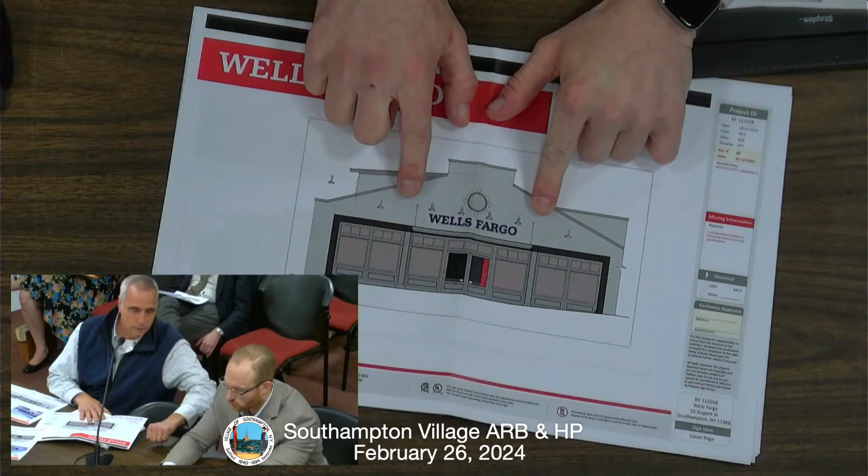There should only be one canopy. If you're talking about the facade of the building that faces east, let's use compass directions. So that's the east-facing facade, correct? Correct, with the canopy. Okay, I think that'll be clear.

Okay, all right. It'll be a metal canopy with an internally directed gutter along the backside of the canopy, so it won't be an exposed gutter. It'll be an internal gutter in the canopy itself, and then a leader down through the building and out onto the pavement. Details haven't been drawn yet, but once we get to that point, we'll submit those drawings.

Well, here's the tricky part, we can't really give you an approval for something we haven't seen. I can give you directionally what we think, but I can't put the cart before the horse. Of course, so let's do this.

Let's talk about directionally what we think, and then we will talk about the signage, because I know you need to get it manufactured. I know we've held this up a little. I'm trying to be fair.

And on the side facing south, the south facade of the building, that's just signage and lighting on the existing as is. You're making nothing else over there, correct? Okay, so you are proposing the signage and then the light fixtures, correct?

And four of them. And are the Wells Fargo lights backlit? No, that's why we removed that. They were originally, but we got rid of that, so they're just gooseneck lighting. Are they showing the placement of the gooseneck?

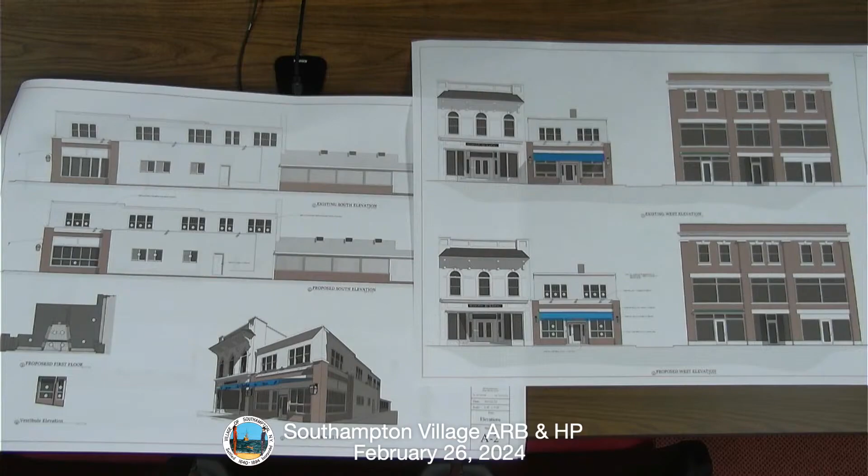So there are 3 panels, but you said bifolding? Yeah, they're gonna bifold into the store itself, into the restaurant itself. So all three would fold back against one wall, so you'd have a big opening? That's correct. I'm trying to get, how do you get from 3 to 2? Oh, there are 3 window panes, if you see here on the blow up, the accordion - they back, accordion into the corners.

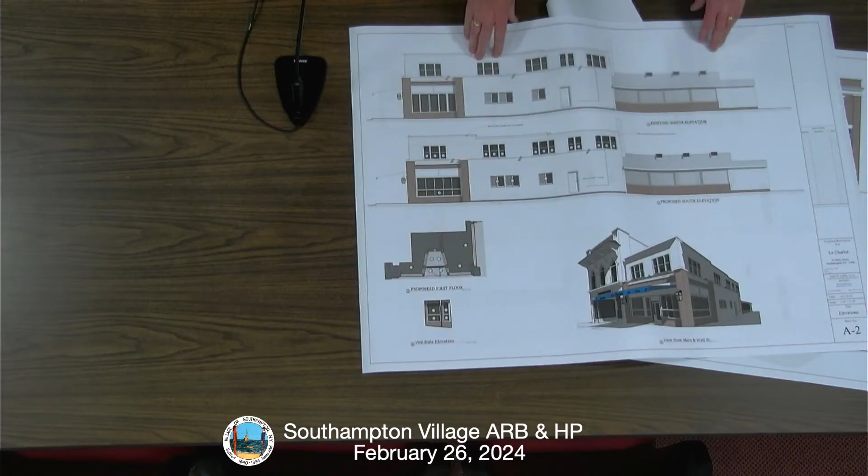Oh okay, I got you. Allows the bar to be open. Okay, yeah.

We kept the door the same, we put the old front door back the way it was. So really, I think the only change you'll see marked a little different would be the window configuration of the restaurant.

And the bifold would make it more similar to the appearance of the plate glass that was originally there? Is that something you mentioned last time? Well, the plate glass was a single pane, now it'll be 3 panes. But this had 3 panes originally, 1 horizontal and 2 vertical.

Can you move the mic over for me? Oh, he wants you to talk into the mic. So if you're at the table, maybe sit, don't stand in between, it's like Simon says. Okay, can you hear me?

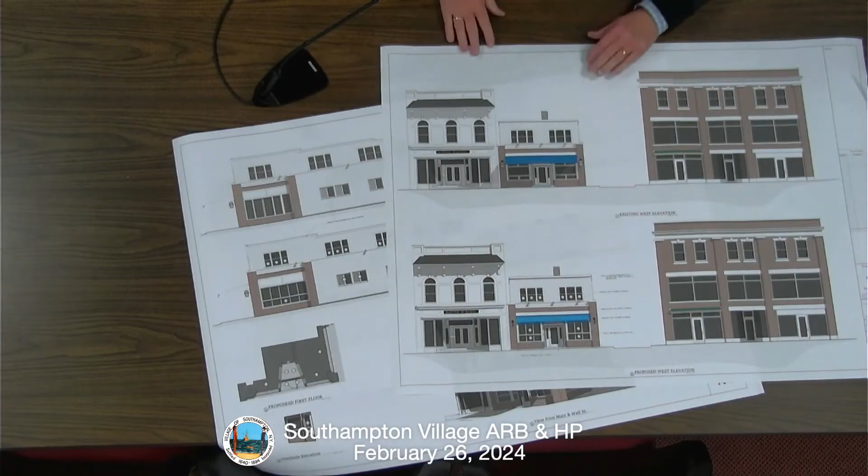Great. So these are the existing window configurations. Basically it's a 5-light window, and we're going to be having a 6-light window. Where there were 2 here, now we have 3. We need to create the horizontality of these folding windows. So the real change will be in the window presentation to the street. Otherwise the rest of the building is the same.

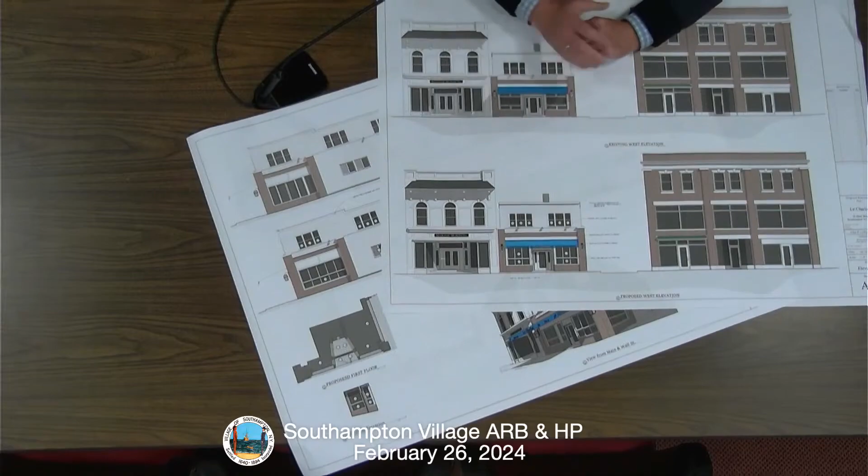And I know we also kept the same lighting. I know it might be an issue, but I looked at it through the eyes of when Zach gave us that picture of the building from 1979. The fixtures appear to be the ones that were there originally, they've been there for 45 years. So I figured we'd probably keep them, but that's something we could discuss.

Here's my question - if you're going to all this work on the building, those light fixtures, right now isn't that exposed pipe going across the front of the building? Are you gonna rewire them into the building so we're not seeing that exposure, that 1-inch pipe across the front? Yes, we'd like to do that.

So the fixtures are staying, but you're remounting the light boxes. Yes. And also on Bank Street there are several lines of communication and wiring that we'd like to get rid of as long as we're doing it, just cleaning it up.

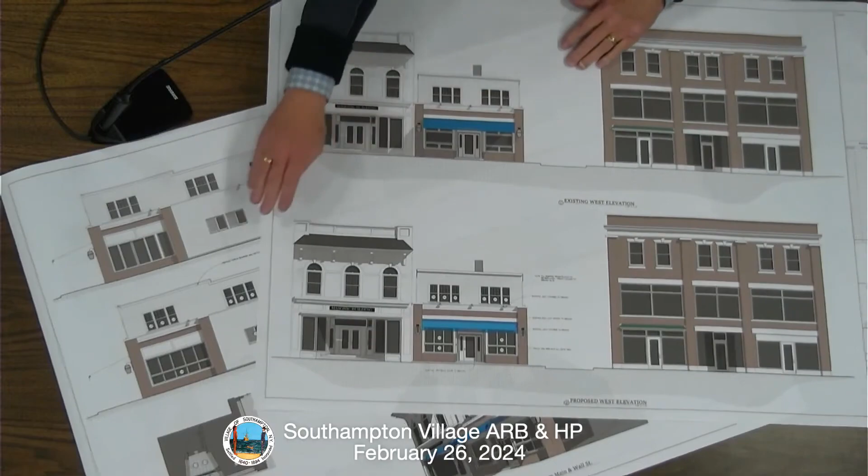My point is that if you had the option to put in a fake laminate floor or a real wood floor, I would any day prefer the real thing. So that's why I'm not familiar with fiber cement and don't know what it looks like. Does wood not work? I'm just curious, I had proposed wood siding.

Because it's natural, like we're trying to be eco, I'd be totally fine with having a wood sided building. I think that's obviously appropriate for 1902, or 1912 when the building was built, if not for the fact that it looks like these asbestos shingles have been on there since then.

So this product was designed as a replacement for when these fall off, because they're brittle. If you go down Broadway, you can see where people kick it and they break, they're fragile. They're better now because they're fiber, so more durable, but they're meant to look the same.

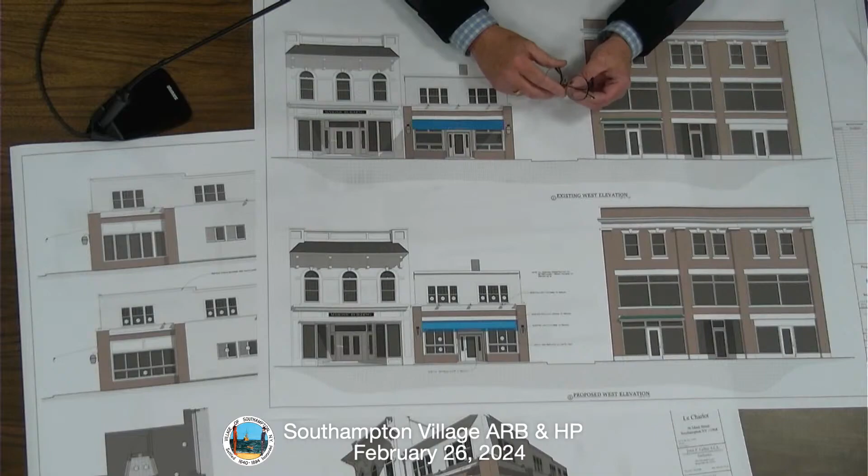I think they'd like to see a sample. I can do that. So if John is bringing in a sample, the question is between wood, natural wood, or the substitute, perhaps a sample of wood, so this way Jane and I could see a comparison. Not a problem.

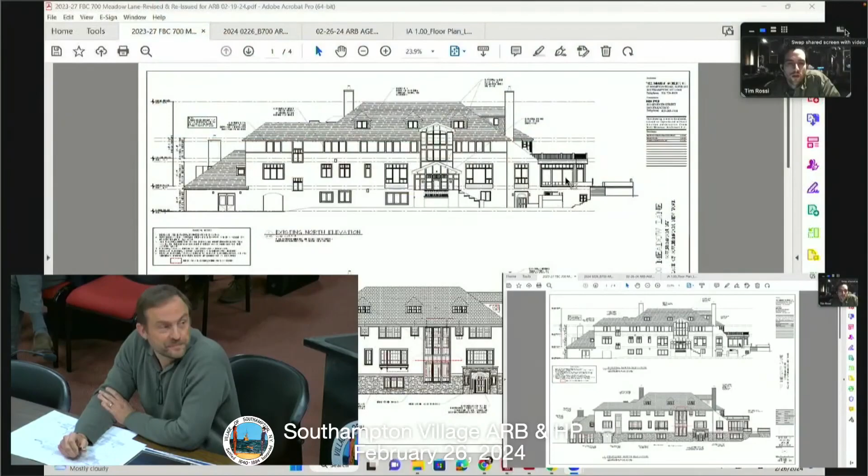I believe one of the bigger issues or questions of the last meeting was the front door entrance. So we have gone back to the original roof line and replaced the entry into the historic location.

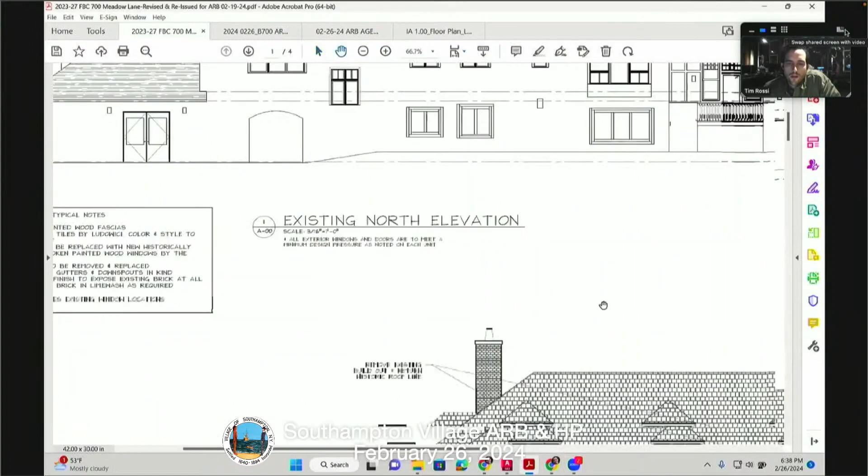So as you see, this is the existing design with the large stair tower that was objectionable to most of the board. I'm going to zoom in to show the revised elevation, which is much more in keeping with the historic fabric of the building.

We've replaced the stair hall with a large divided light window. We've gone ahead and changed all of the windows back to casement and kept the divided lights, again, to make it as historically accurate as possible. We've changed the window openings so they are more varied throughout the front facade.

At the front door, we've reused the existing front door that was previously located here and added a window. We've also changed the masonry base from brick to stone, so it feels more in keeping with the English manor style of the original building. In the renderings, we've shown this as a carved stone surround with openings on either side, so it's much more historically accurate.

Going to the side elevations, most of this is remaining as previously presented with some small tweaks here and there.

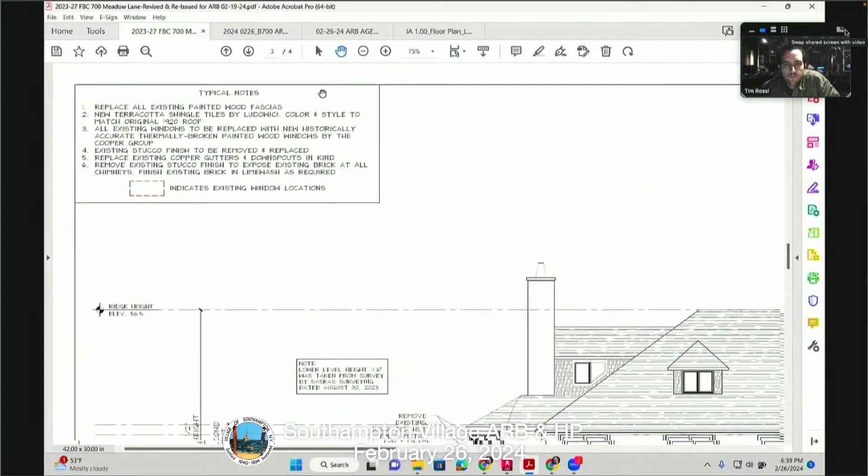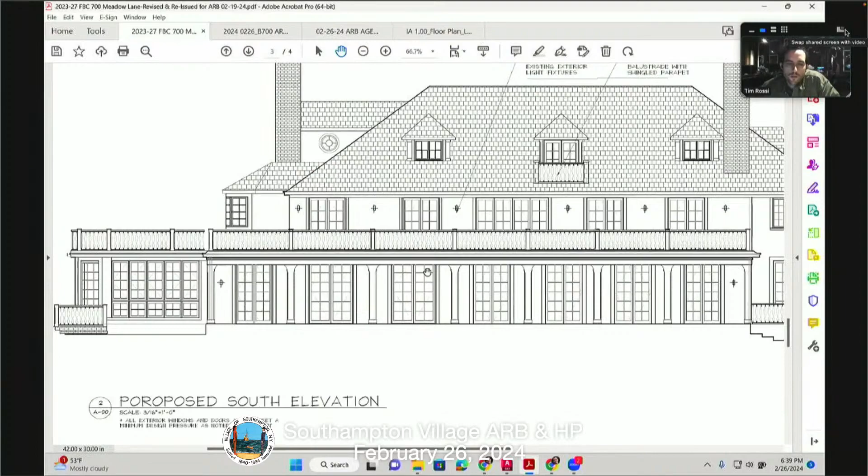On the rear facade, a major comment was the existing balcony with the trellis and the larger columns, and that the front facade felt disconnected from the back. So we've made all of the windows on the back divided lights, so it's much more in keeping with the front, and have shown a more simplified, open column, as well as changed the balustrade to something more in keeping with the style of the building.

I'll go to the renderings.

You'll see here some comparison between the historic image and our proposed elevation, also showing the carved stone surround we're proposing for the front entry, as well as the more varied stone base that would wrap the bottom section of the building.

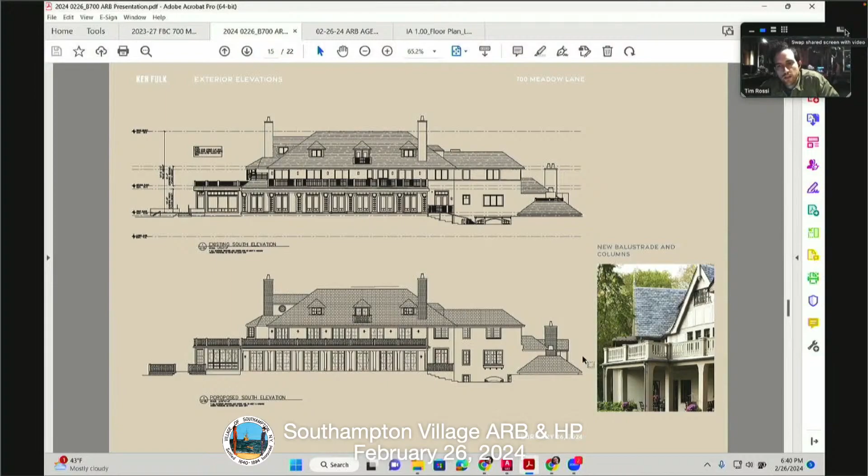On the back side, showing that more Tudor styled column, as well as the balustrade that wraps the balcony on the upper level.

And then a rendering showing the new facade without the stair towers. That roof line is really expressed and strong. Coming up to the front of the building, you'll notice the cast stone surround and the more varied base stone on either side.

We've kept the vining in keeping with the historic image, and also have some small windows around the entryway. The existing stair has gone away, so we've planted that entire area to make it much more lush and softened that front facade.

On the back side, you'll notice it's much more open. We've taken away the double columns as mentioned, and shown all the divided lights. And then you see it here from the sky, which is mostly in keeping with the existing fabric of the building.

I'll go back to the front rendering for any comments. Board members, does anybody want to start first?

I think it looks good. Great, it's good to hear. We're very happy with the change, honestly. It has the feeling of the original. I think it's so charming, an old house. Thank you. Well, I think what they did, if you look at the original photographs, they went from what had become a bastardized building to restoring it to what it was.

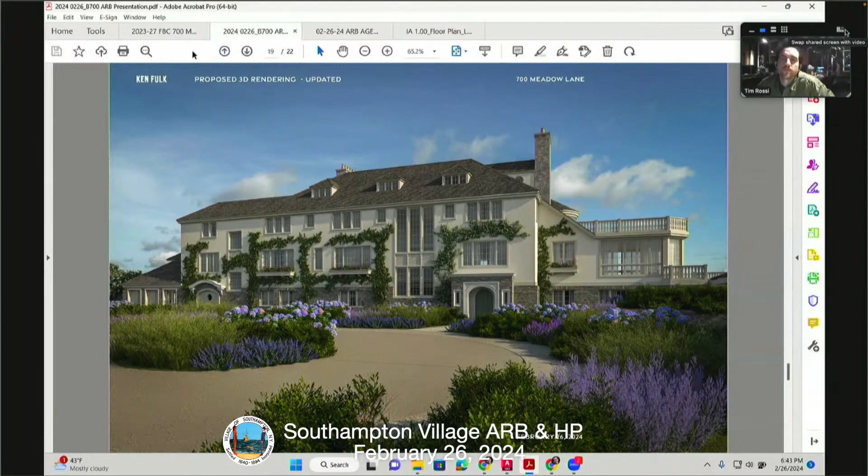Yeah, we're probably colored by the lack of color and the presence of sepia in this vintage picture, which makes it look more earth tone than cream color, almost like a cafe au lait.

On which facade? On the original Frick house that you sent us as inspiration - that big picture, 700, that looks to me to be brick.

And I believe the original house - was it stone or was it brick? Is there a historic reference to it? It's unclear from the photo, just given there is definitely a datum line you'll see.

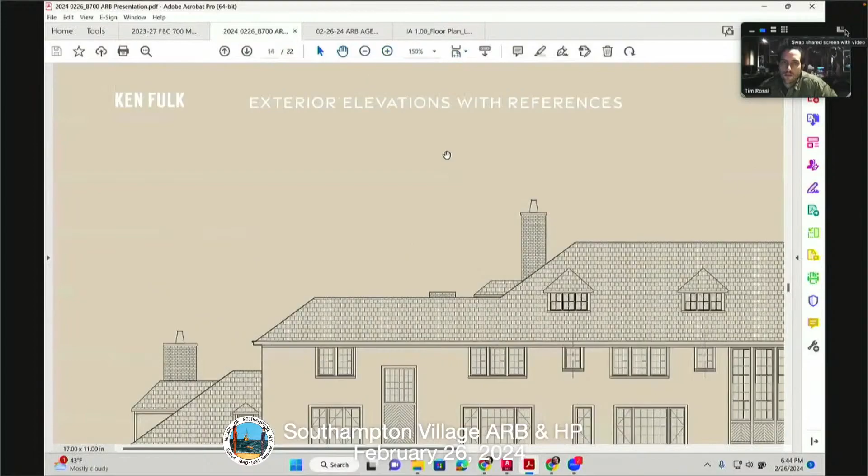Does any of it still exist behind whatever? No, it does not. Really? No.

Is it also a framed wood wall with stucco on it? And in your renderings, are you stone across the front and brick across the back? No, we've only used brick. We're reestablishing the brick chimneys - right now they're covered in stucco. Okay, so we liked the mix of the stone and brick.

This reference, on the lower left, is a coastal building in Rhode Island. But this architect, Harrie T. Lindeberg, worked quite frequently - worked on the Coxwold building that you pointed out. That was all stucco, but felt it kind of anchored the building more than the brick would. And in most cases, if we are referencing this house to be inspired by an English manor, stone felt more appropriate.

That's one of the things I'll ask Zach in his report, because you just don't find very many examples in Southampton of that kind of stonework, and you wouldn't have then.

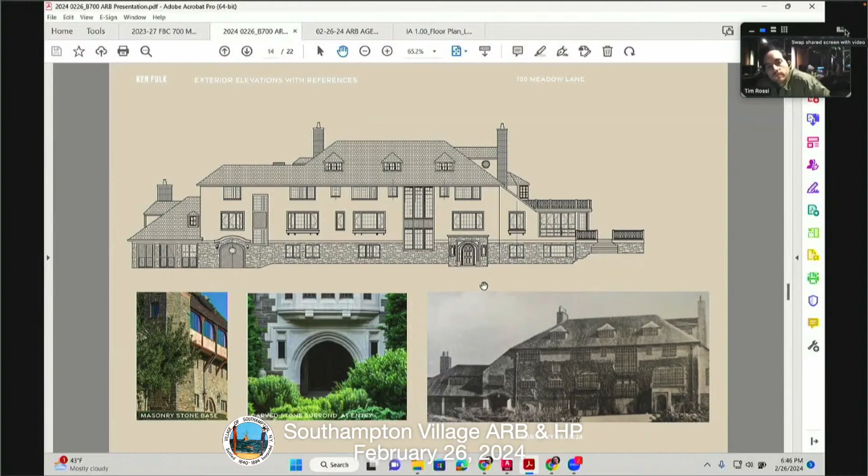Otherwise, you brought the house miles forward. You really listened to a lot of the issues that we had to say, and I think we're coming along very nicely on this house.

Other board members? I think the way the landscaping relates to the entry is really successful and made big improvements. Also moving the front door back down is so much better, and it has a more welcoming, inviting feeling versus being almost a stand for speeches. So my only comment would be the stone versus brick on the bottom wall of the house exterior - we'll see what Zach has to say about that.

Are we gonna talk about the other side? Go ahead. I'm confused about those weird columns - those were not originally there, you know about? We haven't located an image of the backside of the home. Where did they come from? They're currently on the home - they're existing. Oh, okay, thank you.

And this change was also preferred by the clients, just to open up the porch a bit more, make it a bit more open and welcoming as you're coming off the beach.

I think it's much improved. I would have never thought that by moving the front door over, it would make such a difference, but it really does. It really restores the house to its original state, so I think it's really coming along and looking great.

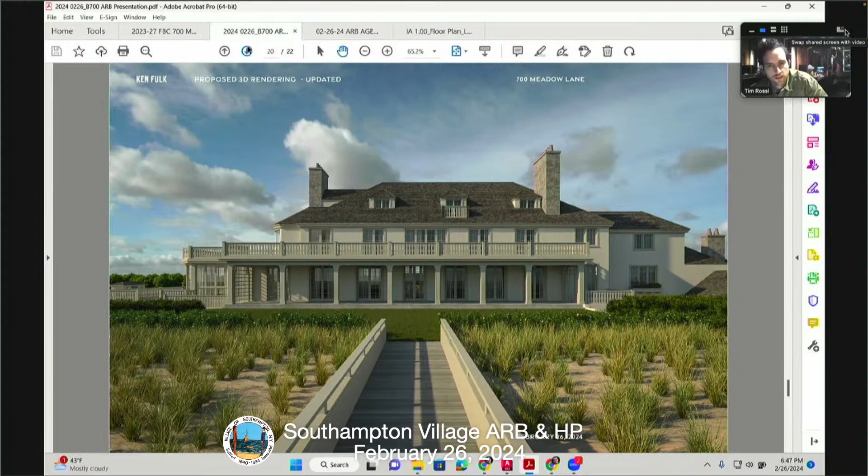Any questions or comments from the public? All right, so I'm going to adjourn this because we need the historical board. Understood. And then we'll see if we can do a little research on the brick versus stone situation there. Understood.

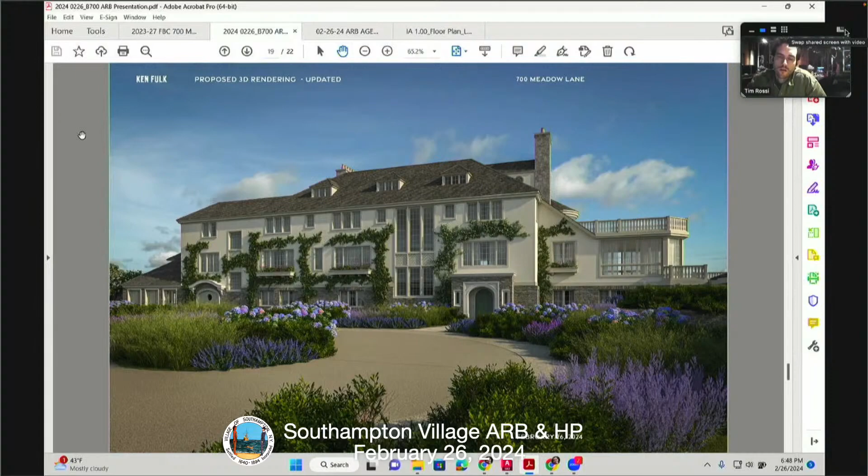So I'm going to move that we accept the applicant's request for adjournment to March the 11th for 700 Meadow Lane. Is there a second? Second. All in favor? Aye.

Guys, you've come a long way. Thank you, it's really, really nice. We didn't get a chance to drop these off. Do you guys want some copies of this presentation set? Yes, you can leave them here. That'd be great. And just to clarify, you're just looking for a set of materials for Zach, to make sure he has the most recent - the historical. Here's five for everyone.

Couple more 100 pounds of paper. All righty, so that brings us to adjournment. That takes us to new matters.

Thanks, Tim. I think Tim had a question, just to clarify the material issue. Is there anything further you'd like to see beyond the material samples in person? We're adjourned at this point, so we'd have to reopen the record. That's fine, okay.

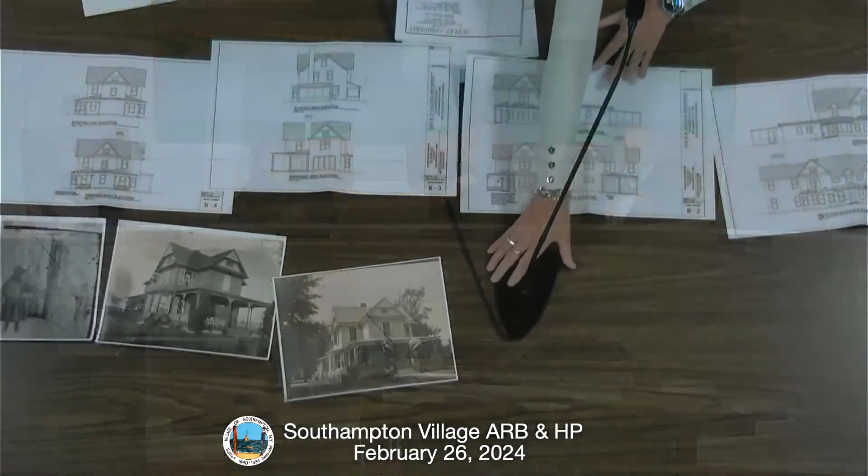Okay, this goes back to like the last trustee meeting. John did a long presentation. Nobody could hear it? None of it, just because the mics don't pick up from a distance. Okay.

Lisa Zaloga, I'm the architect for 121 Elm Street. This is a proposal to pick up the existing residence and put it on a new foundation in the same location, and do an addition on the back of the house.

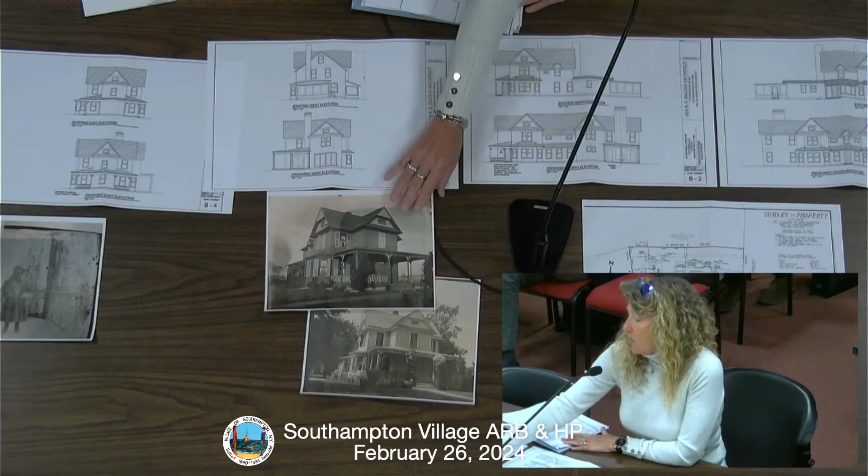We have some pictures from the olden days, if you will. So the front of the house at some point in time had kind of a wraparound porch, and at some point it was actually cut back to the little bump out that's on the street side, or the east side of the house. Our proposal is to put that back and pull that porch forward some, which if you look at this picture, you can see what I'm talking about. This front porch right here—

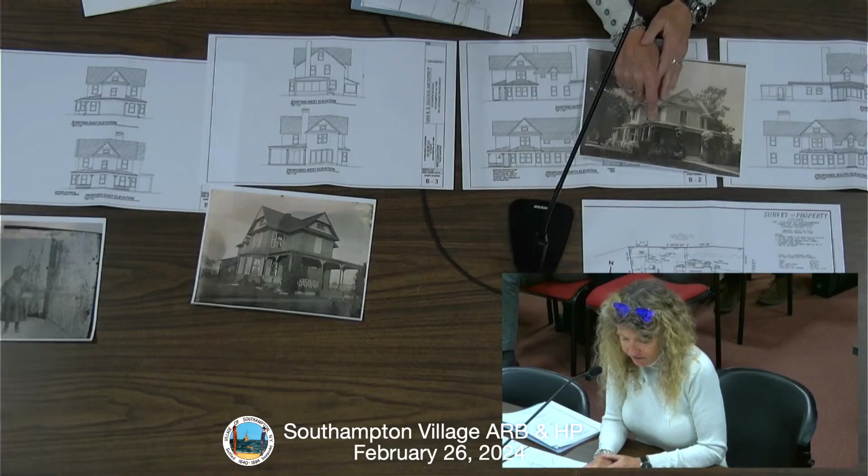Currently it's at this facade. It's pulled back, so we want to pull it forward, closer to the street, which you can kind of see here. Oddly enough, the front door to the house does not face the street. There are two side doors into that little front entry, but we still want to bring that porch back. Right now there's a big, huge rhododendron there, so you really can't see the front of the house at all.

Is there any evidence this was ever a duplex? Because there are several on that street. Yeah, because the door configuration was weird. The door is weird, but it comes into the same place, and the stair is actually in there, in that little foyer area. So I guess it's possible, but not probable. I just wondered when I was walking around it. Yeah, it's interesting.

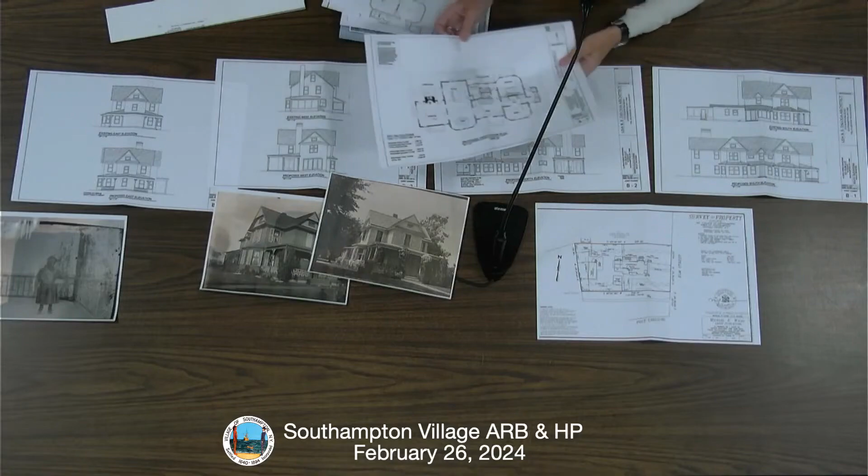So, like I said, our addition is proposed on the back of the house primarily, other than the change to the porch. If you walked around it, you'd find it has two gables, the cross gable at the front of the house, and at the back there's a one-story section, and then another one-story section that's currently a screened-in porch. Our goal is to take down the screened-in porch and the one-story section and put our addition on the back half of what's currently the two-story house.

The screened-in porch—I tried to find information as to when that was built. There's nothing in the building department for this house that shows anything back to 1971, so it was probably before 1971, but I can't swear to it. The one-story portion that's currently the kitchen was definitely added on, but I think it was added on a long, long time ago. If you go down into the basement, you can see where there was a stairway that's been boarded over for that addition. It's a crawl space, definitely done after the fact, but I can't say exactly when.

So, like I said, it's a two-story addition on the rear of the house, in the same general location as what's currently there, just a little bit shorter. We're also proposing a little pool house and a little two-car garage.

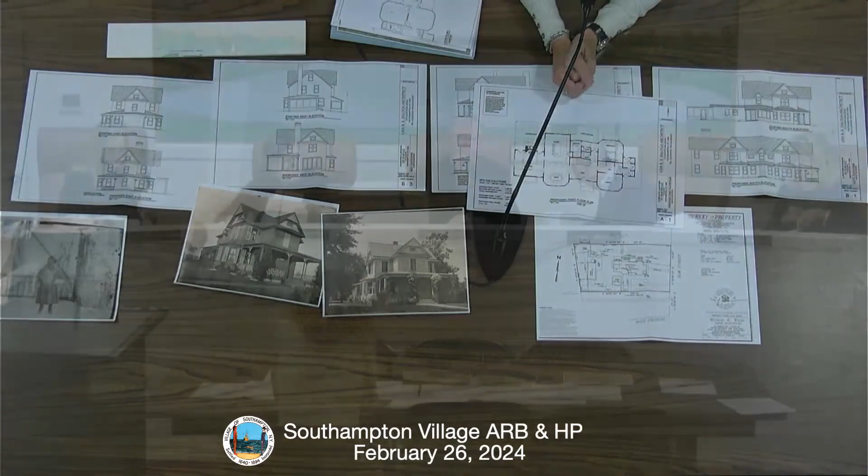Are we getting Zach in on this? Yes, well, one thing I will say, we will be getting a historic report on it, so we won't be voting on it tonight. I want to hear from him.

I think it's a really charming house, I gotta say, and it's certainly an ode to overgrown landscaping. I thought, well, this is the cutest house, and then I realized I drive past it all the time but I've never seen it because of the giant bushes - it's a very large rhododendron there. They're pretty fabulous.

Jane, Nina? Yeah, when you were talking about the stained glass windows, I was also thinking they're in the attic, so it doesn't seem like that would make a big difference to me. I would say whatever you can keep would help out. So I think it's looking good.

I would prefer a natural shingle over white, but I think it's better than the blue. Baby blue? Really, I love the blue, I like the blue. Yeah, I don't think it's historic, sadly.

Pending Zach's report, and I know Lisa goes to great effort to maintain and keep historic elements, so to the extent any of those historic elements can be preserved, I'd support that.

One thing that was of concern - you say you're lifting the house. Is it going to be the same level, or is the roof line changing? Same level, same location.

Just putting in a new basement? Are there any exit wells? Are they building out a theater and gymnasium there? And a spa in the basement? Yes. Okay, we're doing all of that.

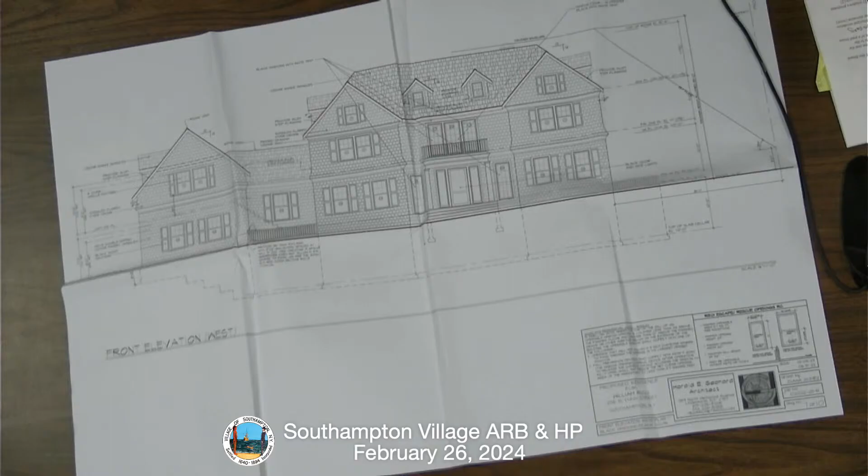No, it was not previously approved. It came to us, but it was never approved. That's helpful. It was submitted, but it was never presented. And the former owner had some - because I remember I walked the site, two of us walked the site at one point, right? But it never actually got to the meeting. Good, okay, perfect, good to know then. Well, we're here for it now.

Could I just ask, were the windows - was there a COA on this building before it was sold? It had to be, right? It was sold under construction.

Mike, identify yourself. Yeah, Dr. Ritchie, Bill Ritchie, I'm the homeowner. We bought the plans. It was never under construction before we bought it. Okay, well what is that up there?

But there's no CO? No, there's no CO. That's what I want to know - the windows. According to the current contractor, the color was not specified on the plans for the windows.

Okay, but you may know more about that, Mark, because one of the prior owners did a little bit of 3-card Monte with people, so as you know. That's true. I'm going to say let's just move on. I just want to make sure - I've been told that there was no fenestration color shown on the windows. I would find that surprising, but okay.

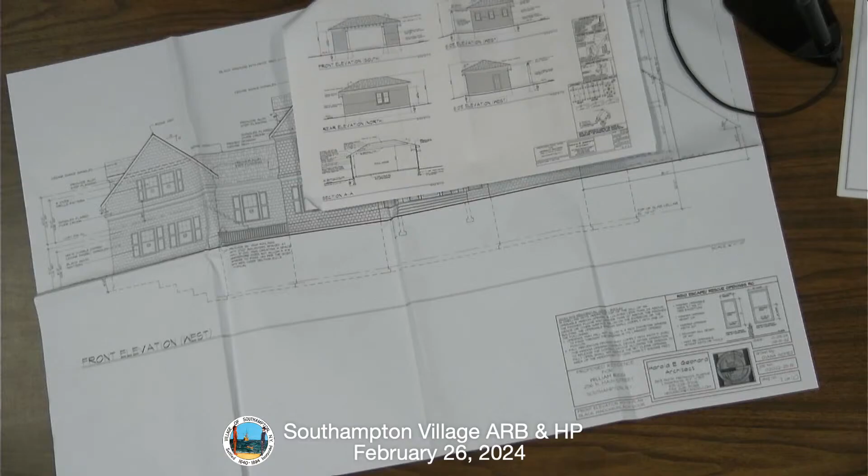Oh, here it is right there. So it's white painted cedar shingles, white trim, white windows, and a cedar shake roof. There's a little pergola attached to the pool house facing the pool and pool area. It's at the appropriate size behind the window. The closest visual feature to it is actually some of those large fuel oil tanks.

What's the square footage of this thing? I have it right here - 545 square feet.

So the pool house may or may not have been approved, but the records say there is one. What you're looking to do is just take the same thing and move it? Yeah, move it from the south side to the north.

No, from the north to the south. Like more sun in your pool. It was here? Yes, okay, my apologies, yes, from the north to the south. I was looking at the current proposed plan - my apologies, I thought it was moved from the north to the south.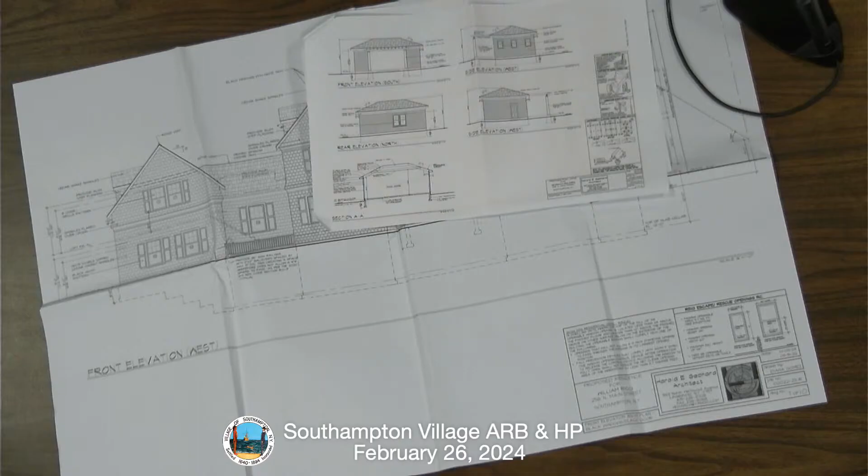What may have happened is there was an early request for this update that just never came forward, because I remember something like this, a very large one, tacked up to a board in the backyard when the house was under construction. And the permitting history I was trying to put together was a little sloppy, but we're here to try to sort it out.

So, board members, I'm a little confused. What is this, the house? Yes, the house, I thought you brought plans, and I'm just confused what the sequence of events is. But another builder came in and got the plans approved, and then the house was built. It was sold with the existing plans, which they were then built from. So the house is built at this moment.

95%, not the pool house though. Not the pool house. And the gate is a new consideration. The pool house is a consideration. The consideration now appears to be the moving, and the gate.

So that's, unless you can find anything in the file that tells us different. No, there are, this, like some of the other files with this particular builder, are problematic. So, I'm not in love with the black windows, but I'd love to hear what other people have to say.

I thought the pool house move was not a problem. What's the gate? The gate's fine. Yeah, and then the door. I don't know, with the front I'll defer to other people for the moment.

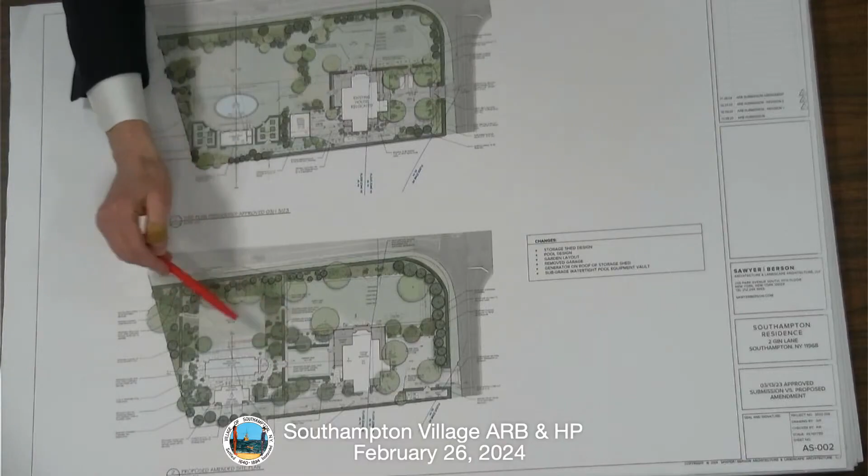Finally, well, not quite finally, the oval pool from last spring is now replaced with a rectangular pool. The integral spa is now a separate spa over at the north end of the pool. The pool fence, which was visible in the original scheme, has now been integrated into a privet hedge that surrounds the area, and it's a code-compliant pool fence. And there are wooden gates, you can see them in the drawings that we submitted, that allow access into this enclosed pool area.

Finally, the storage shed, which was a simple rectangle in the last spring scheme, has been further developed. It's here shown in roughly the same location, just a slightly different plan configuration. Here are some renderings of that proposed storage shed. It has changed slightly, the coloring of the stone has changed.

Your storage shed has three sets of sliding doors? Yes. And is it really a storage shed or is it really a pool house? Well, here's the thing, we are in a FEMA zone.

It has a functional use for the generators that sit on the roof. Semantics aside, we have to call it something non-habitable because it's in the FEMA flood zone. But it is not habitable, so no, it's a storage shed. Anyway, we have generators up on top and breakaway construction, but with a stone veneer.

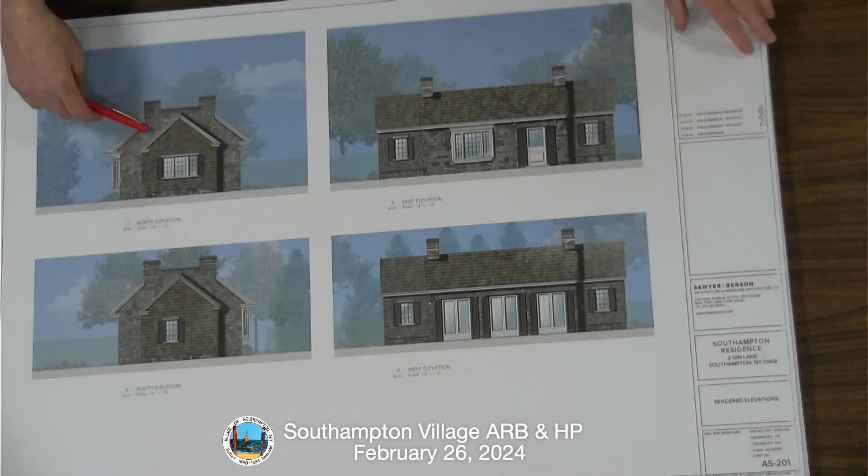Regarding the stone, it is used in kind of a utilitarian manner around the Hamptons and in Southampton. We were actually discussing this in the office, some of the windmills have it as their foundation. It was ballast or bluestone or schist typically, and we've introduced it here almost to recall that utilitarian use, as this is kind of a secondary structure. It's being used at the walls flanking the center pavilion, and then at the front and back walls of that area.

And then maybe, Barry, you could show them the stone. We've been spending... is this the big reveal? I've seen what's in the hallway. This is the big reveal.

Ryan Company has generated for us 10-year-old weathered shingles, so you can see them with the stone. And it should be noted, there it is. Sorry, he can't get it through the door, he can't get it in. All right, we'll stand up.

You'll notice, though, that it's a mix of grayish and blue and a little bit of brownish schist. We'll continue tweaking this, assuming it's approved. Probably a few more iterations before construction starts, but that is a pretty good representation. It is a veneer because these are breakaway walls, so that's about 1.5 or 2 inch thick stone, but with the joints, we're trying to convey the appearance of true rubble stone.

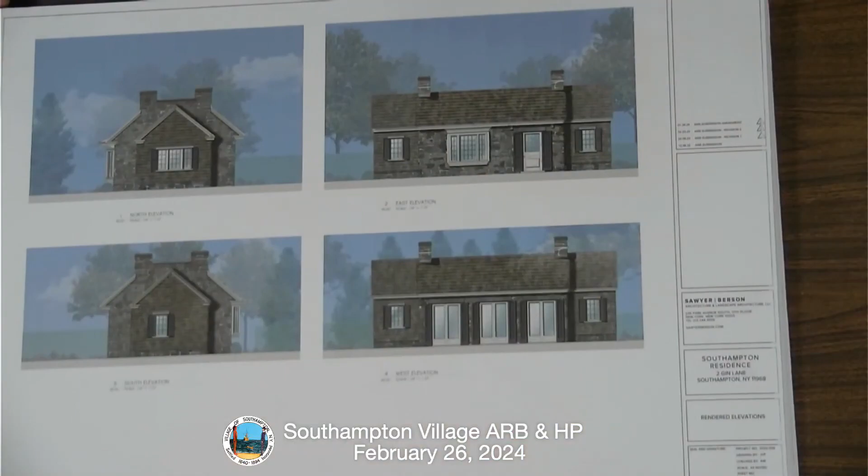And I just want to reiterate, this is a storage shed. Yes, it's a storage shed. To my thinking, because storage sheds don't usually have 3 sets of sliding doors and windows on all sides. I've never seen a storage shed so 800 square feet. 800 square feet with a fenestrated floor. Yes, okay, I just wanted to make sure I was following. It's a storage shed.

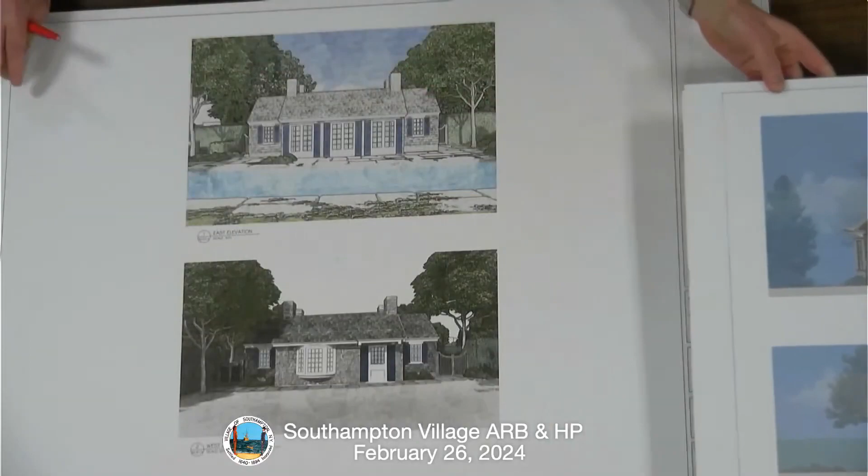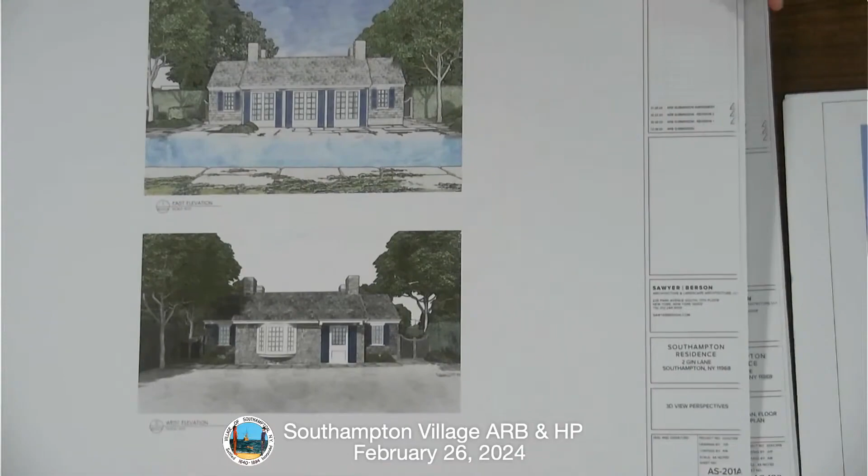We have also brought along 2 additional renderings. It's the same architecture, these were just generated in our office, and we thought that they conveyed, gave you an idea of a better feel for the aesthetics. It's an unassuming structure, subsidiary to the main house, which is, of course, the historic structure. We are going to be mimicking the shingle exposure and shingle species, the western red cedar, and the shingle roof.

Do we have that? What's this, page one, is that? That one's not in. Okay, thank you. Not, but it is the architecture.

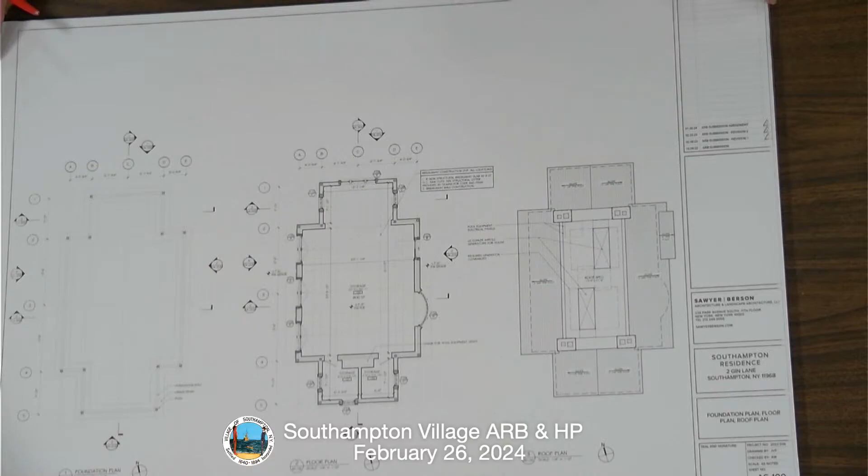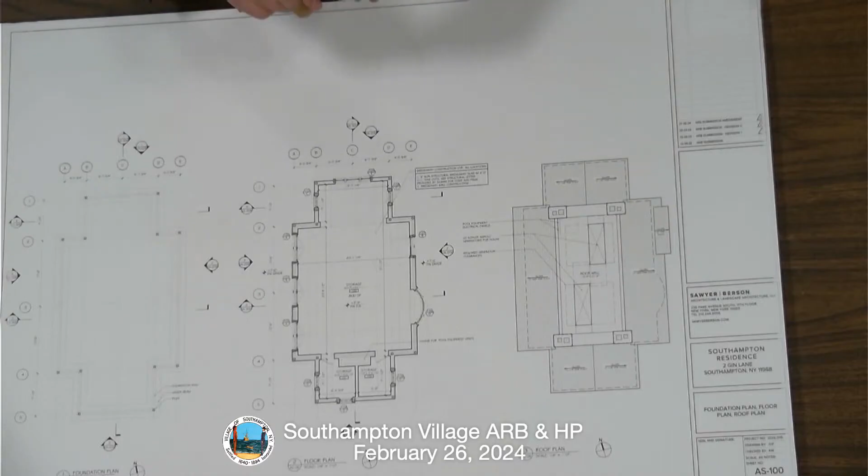And we did include as well, so it doesn't really matter, but on page 002, where you have the location of the storage shed, there does not appear to be a bay window. But when I look on page AS-100, there appears to be one.

Sorry, where are the plans for the storage shed, the floor plan? It is AS-100. Wait a minute, there's storage rooms inside the storage shed. Yep, okay. Here, did he say dash 100? How come they told me? Okay.

But I don't see any equipment in the plan. No, it's on the roof, in a well on the roof. On AS 200, yeah, it's in the shadow on the upper right. Pull it up. Here we go.

Okay, here's a cross section through the shed. The generators are up here at a FEMA code compliant elevation, and they sit in a well, so they are acoustically isolated from the neighbors and not visible to them.

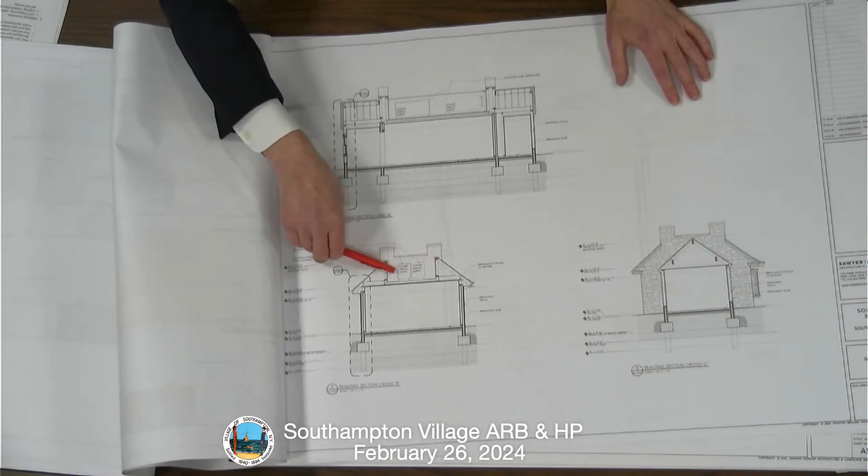And here's the long section, and you can see the two generators. And where's the pool equipment? So, pool equipment, I will pull up first the site plan.

Sorry, here, I've got it right here. Right here, we've dashed it in on L-100. The pool equipment is just to the northeast of the pool. It's in a vault under the paving. Okay, so it's below grade.

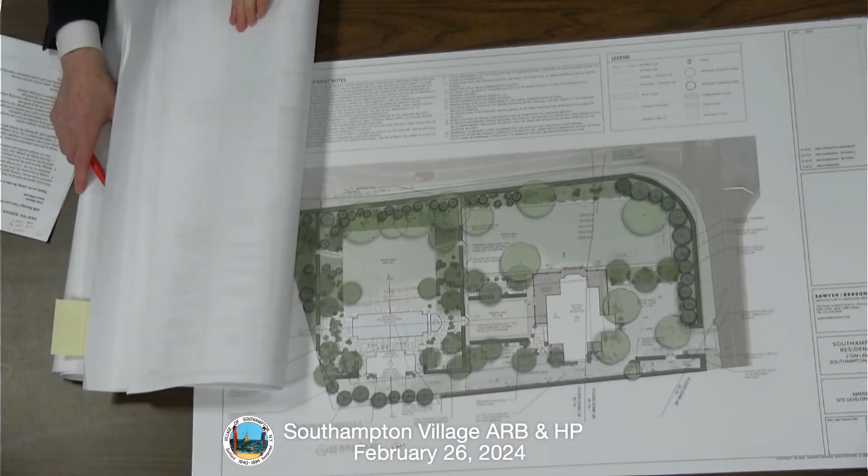I don't think that's actually our purview, is it, Alice? The location of the pool equipment. It's interesting, it's a quandary. Yeah, how about that storage building, the shed? Can I posit it this way?

The owner, well, there was pool equipment in a well on the roof of the garage from last spring. The owner has decided not to proceed with the garage because they felt there were just too many buildings here. So as an alternative, we are moving the pool equipment into a subterranean vault. We cannot put this pool equipment at grade because it will not be FEMA compliant. It's either in a vault, or we have to build a structure and raise it up 18 feet. So that's the quandary we're in.

So it sounds to me - doesn't make any sense - the pool equipment can't go in the shed? It would have to go on the roof of the shed. Unfortunately it doesn't fit on the roof of the shed.

Okay, so here's - Alice, help me here. I think where the pool equipment is concerned, the underground vault is the building inspector's problem. If they have to build a structure that goes up 18 feet because they can't go underground, then it becomes architecture and comes back to us. Is that correct? That sounds good to me.

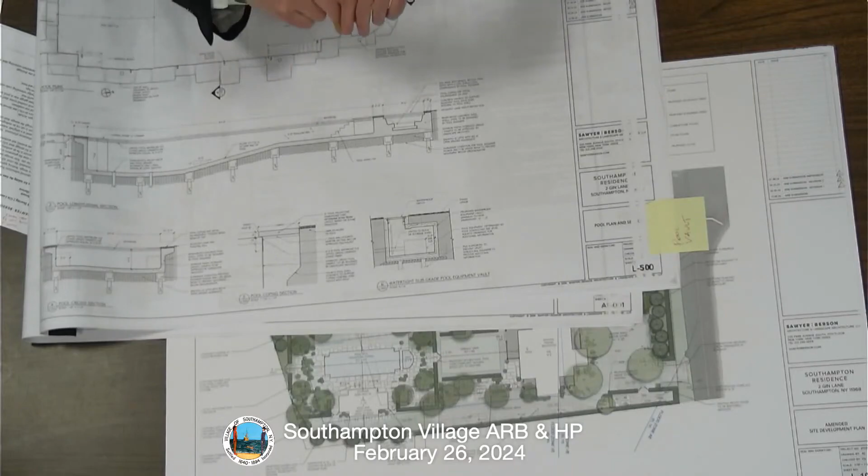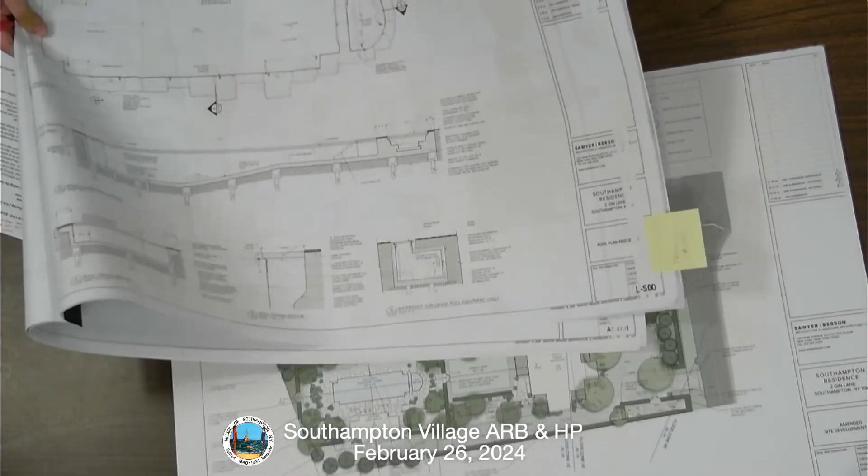Okay, and that's what was approved last spring - the garage with the pool equipment. Right. So all we have to talk about is the fact that you're not building it. Yes, so now you can go back to your bunker, which is right here, on L-500, and have that conversation with the building department. If that does not work out and you have to go back up 18 feet, then you'll be back to see us. If you can see it, we care about it. And again, there will be no garage. Correct.

Finally, there were some additional drawings, civil engineering ones for the septic system and site drainage. We don't need those, not us. Then also a formal set of lighting drawings was submitted, and that is us.

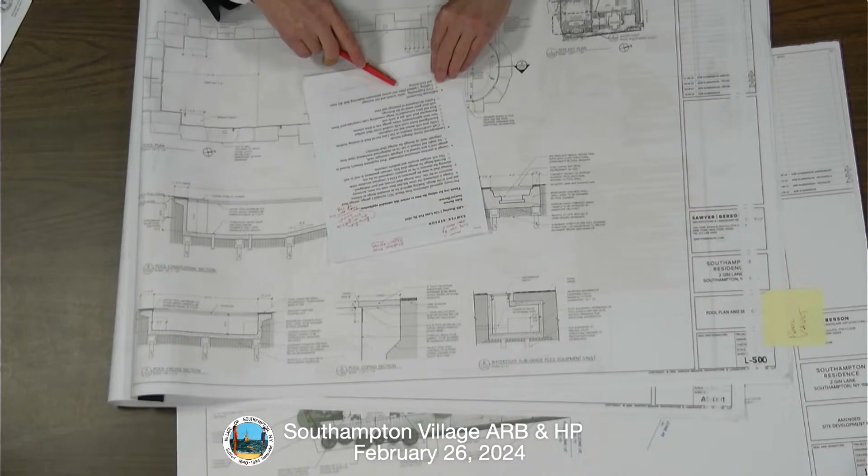Well, here they are, some site lighting on LL1. Care was taken to ensure - oh, you're talking about landscape lighting - well, no, yes, it's here. You can see, but this house is in front of the other house, right? This house is on the corner of Gin, of Gin, but then the ginormous thing that's toward the ocean. Anyway, sorry.

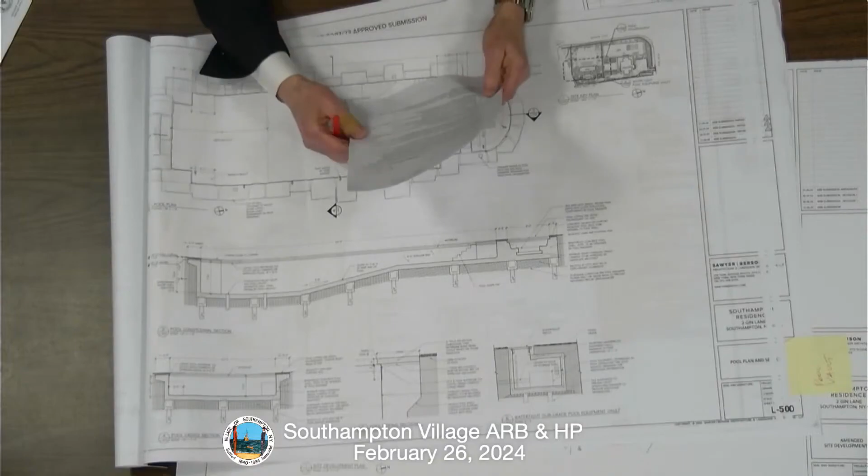Okay, so are these like the ones in the ginormous house? I'm sorry, like if you walk past them they light, or is this more realistic? Is it motion activated? I don't know if it's specifically motion. Let's see, I'll look in the plan. Downlight, tree mounted, fully shielded. It doesn't say. Okay, I answered my own question.

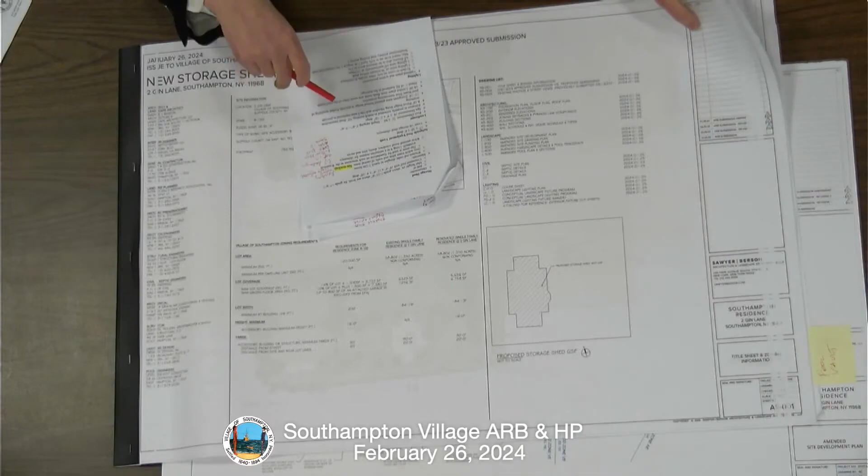But great care was taken with regard to - we went through a lot of work on the other house to reduce the amount of light. Can you make sure it was all dark sky compliant to take care of any glare issues? And we've paralleled that here. Okay, you did a great job on that. Everything is shrouded. The system comes on only when people are in residence, turns on 30 minutes before dusk, turns off automatically at 12:30 a.m., and fixtures can be dimmed down to 1%.

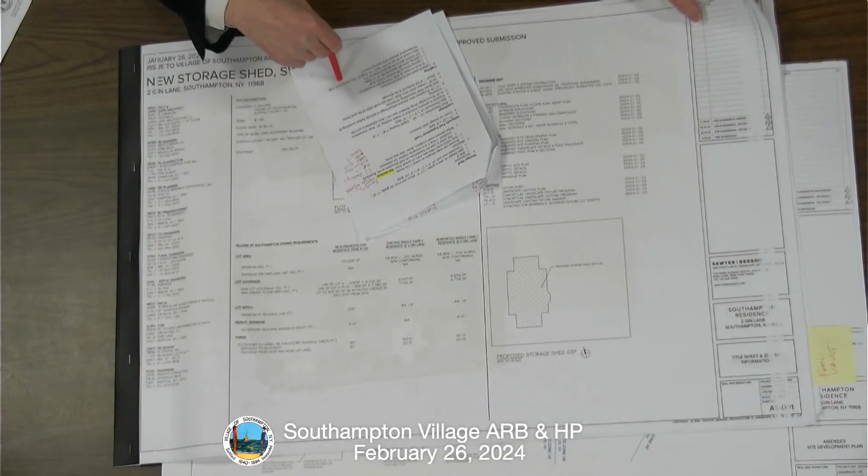Maximum output will be set to 35% from April 1 to August 1, in conjunction with the Southampton primary bird nesting season.

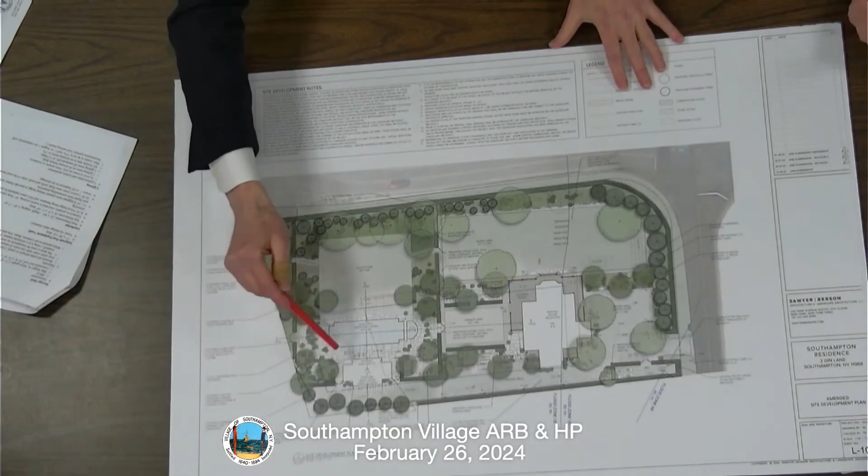The gate is actually pool gates, within the internal property. On the ground plan, there's one set, you can see them at L300. I can point to some of them here. The planting schedule at L300 is also part of this submission.

I have a question: can the bunker go in the shed? No, the problem is it's too wet, the pool equipment would have to go in because it's watertight. But they're making the bunker, right? I don't understand how it can go underground and be flooded, but it can't go at ground level and be flooded with pool equipment. No, it's a watertight vault that the pool equipment goes in.

Regarding the pool shed, structures like that are ancillary and can't have something underneath them at ground level, like a cellar, because it's new construction. It's okay, it's new. I just thought the bunker was a new concept, so I thought maybe putting the bunker in the shed might work. No, we would love to, but...

I don't understand the whole form-follows-function with the shed. There's no bathroom in it, so it's got windows. Maybe you can put a sofa in there to enjoy the pool. So no plumbing issues there. No, but maybe just call it a pool house, with storage in it.

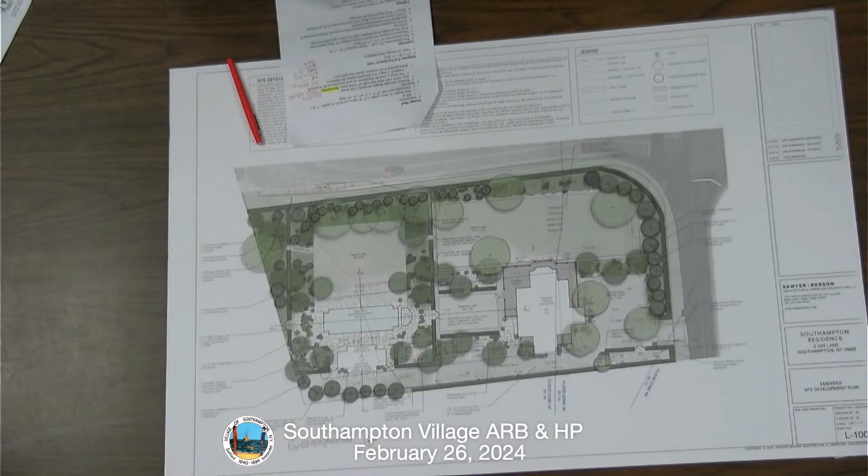Here's one question I'll have: so if you were to remove the stone and do the whole thing in shingle, what would the foundation be? Would it be brick, or would you skin it with brick? We would love to use the stone, but if we, you know...

If it's just the foundation, there are examples of that here. To your point, if it were just the foundation, I don't think you'd find the objection. I think it's using it as the walls that makes it feel like it's not of, even though it's just the center part and the flanking wings. I think quit while you're ahead... I think what you're hearing is that heavy stone as sidewalls just isn't working.

Can you make a real stone foundation? A real stone foundation - it has to be breakaway, it all has to be FEMA compliant where the water comes over. It's a FEMA zone - what is it, the VE? We are in a VE zone. You're in the peak of trouble. Yeah, it's a really awkward thing. In the south, they put up a little lattice.

All right, so counsel guide me - can we approve this, it's going to be a written decision because it's in the historic district. Can we approve it pending the receipt of documents showing the change from stone to shingle? With these elaborate plans? I would advise against it in this scenario.

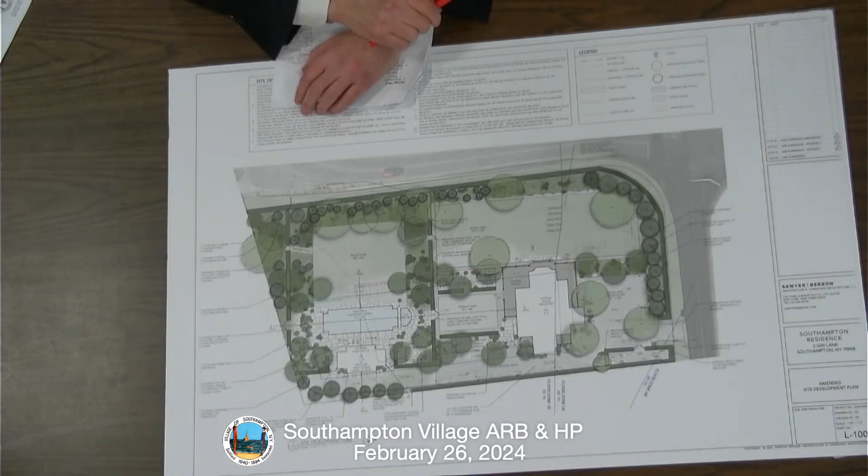We were talking about whether it's the foundation and whether they want to see full plans. I gave a range of 1 foot to 2 feet. Can you have that updated by March 11th? Yes, absolutely. Okay, motion to accept the applicant's request for an adjournment for 2 Gin Lane to March the 11th. Is there a second? Second. All in favor? Aye. Thank you.

Okay, which brings us to - hang on - 92 Little Plains Road. Tell him we're sorry you couldn't get that thing through the door, after all that. Oh, well.

If you'd introduce yourself, please. Yes, hi, my name is Jaime Donate. I am the architect for 92 Little Plains Road, here representing the homeowner. I will share my screen, and I have hard copies if that helps anyone.

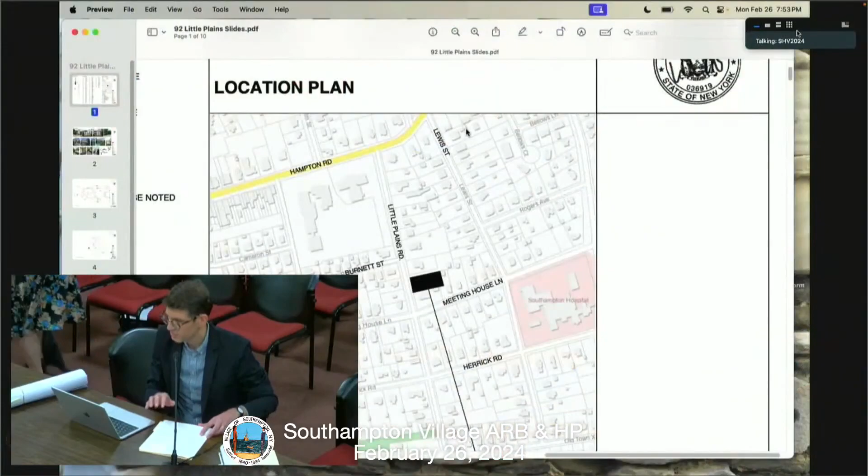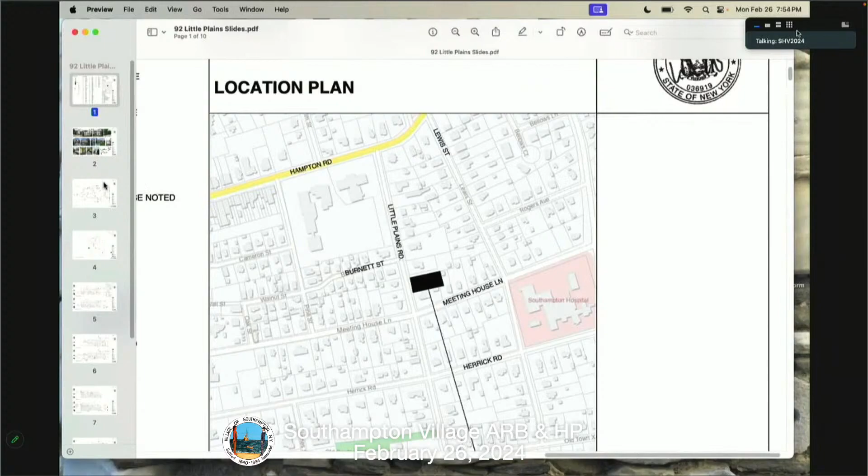Our site is 92 Little Plains Road. We are in between Meeting House Lane and Hampton Road. It is a turn of the early 20th century house. It's been modified and expanded over time, and we're looking to make a number of basically renovations. So I'm going to first explain what's going on right now, and then go through different bullet points of the modifications.

Also, I forgot to say thank you for having us here - I know it's a very busy agenda, so very happy to be included. I will tell you from the onset, because it's in the historic district, we are going to ask for a historic report from Zach for this house, because I know it's been renovated multiple times, so just to understand what is original. We always get our own report with assumptions, but it's always good to have a report so we understand what original historic material is in the house.

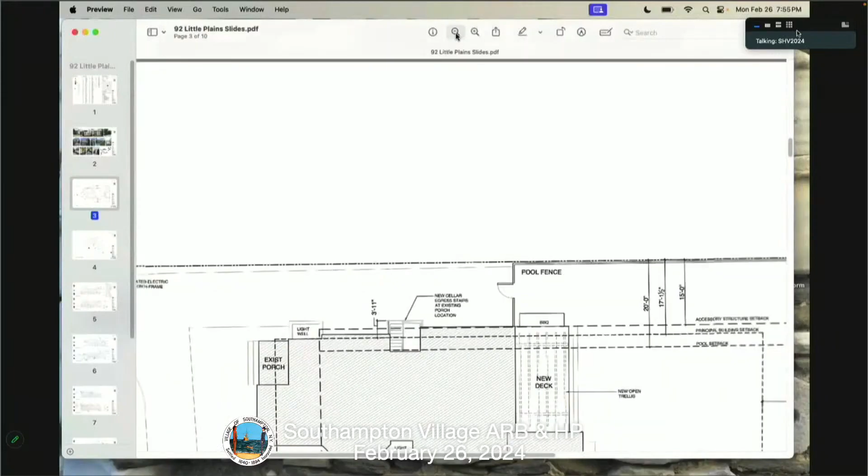I thought I'd jump to explain a bit about what's going on in the lot, to give some background. It's a relatively long lot—this is Little Plains here on the left, and the house sits basically in the middle of the front half. The back of the house has a collection of accessory structures: there's a pool, a cottage, and two sheds, plus a good amount of vegetation. It actually feels pretty cluttered.

But the house, because it's kind of narrow and long and skinny, pretty much blocks all of that from the back. It also has a very dense privet along the front—you have to be basically parked right in front to see the house, and then you lose it. It's actually hard to see the full house or photograph the whole thing. You have these two peaks visible from the driveways.

The backyard is pretty cluttered, and we're looking to remediate that. There's also this circular driveway that is very convenient—we're looking to preserve that as well.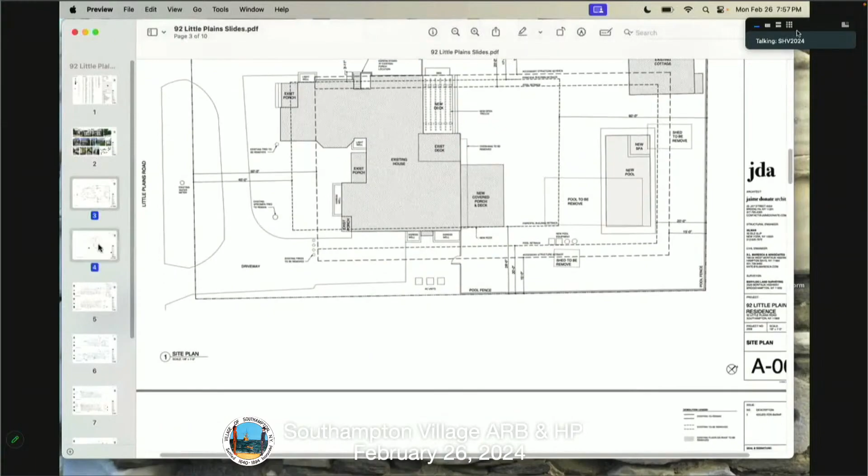In terms of what we're trying to do, the biggest portion of the scope is to build a new cellar. Right now the house has three different conditions, which I think shows how it grew and expanded. On the upper left, that's a crawl space, which seems to be the oldest part of the house. There's a partial basement—a cellar full of equipment. And then this very large other area is a slab on grade—it's actually on grade, with only about a 2-inch difference between the grade around the property and the interior finished floor level, which is just waiting to be flooded.

So part of building this basement is not only to improve the homeowner's needs in terms of different rooms, storage, and better mechanical rooms, but also to help with this susceptibility to flooding. To build this basement, we're going to temporarily raise the house, build the basement, and put the house back down exactly at the same elevation. We think that is important.

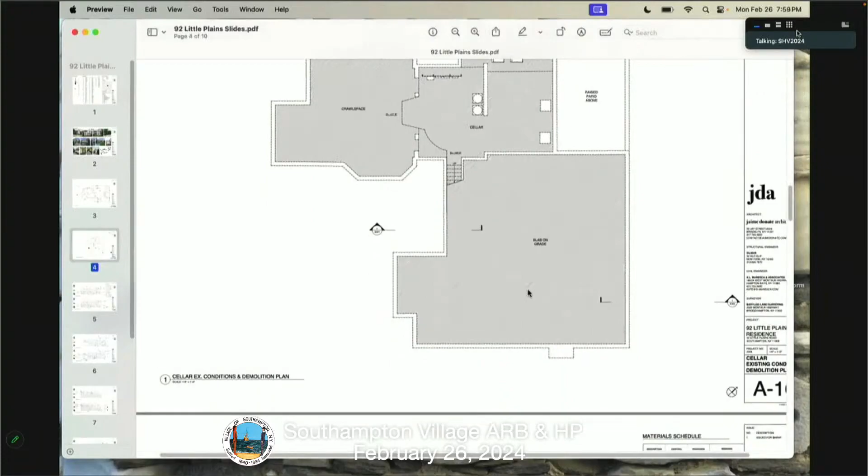You just mentioned it, but it is important. There's a series of these houses right next to each other, and they all have the same condition—the historic homes are raised 20-some inches from grade, and we want to maintain that consistency. We think it's so important; we don't want to lose that. On the part where there's a slab on grade, we're going to lose some ceiling height, and we're happy to do that just to get that portion of the house at a higher elevation. So in terms of scope, that's our major factor triggering much of what we're doing.

The other thing we're doing is, in the backyard, we're looking to remove two of these sheds that pretty much just look like puzzle pieces, and we're looking to relocate the pool.

Just out of curiosity, do you know anything about the history of those structures? No, I don't. They're not in great shape—they're storage sheds, but they're enclosed structures. The one in the back isn't closed right now because the wind's whipping the door back and forth. But it's a little unknown—I think one of them even has an electrical panel. I don't know how the previous owner used it.

I'd say the cottage in the back is a full-on, legalized cottage—a full-on structure back there. So I don't know what those sheds were for. I think the smaller one is presently used for storage, for pool-related storage—not quite equipment, more like pool storage and maybe some gardening tools. The one in the back is big, and we don't really know its history.

Zach may be able to give us some.

We have photos, and I can show them, but we're looking to remove those. We're looking to relocate the pool and make it a little smaller. Also, what we're doing in the back of the house, I'll show you in the elevations, but since I'm here in this slide, the back facade is very modern. We're trying to clean that up a little bit, make it more consistent with the rest of the house.

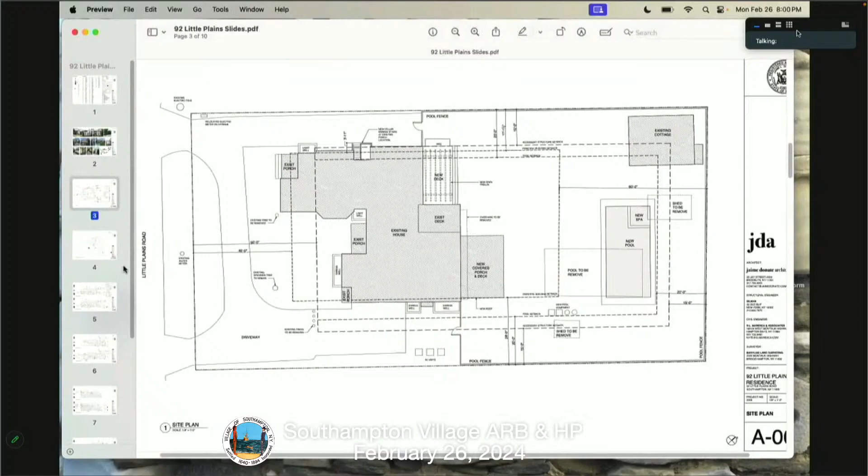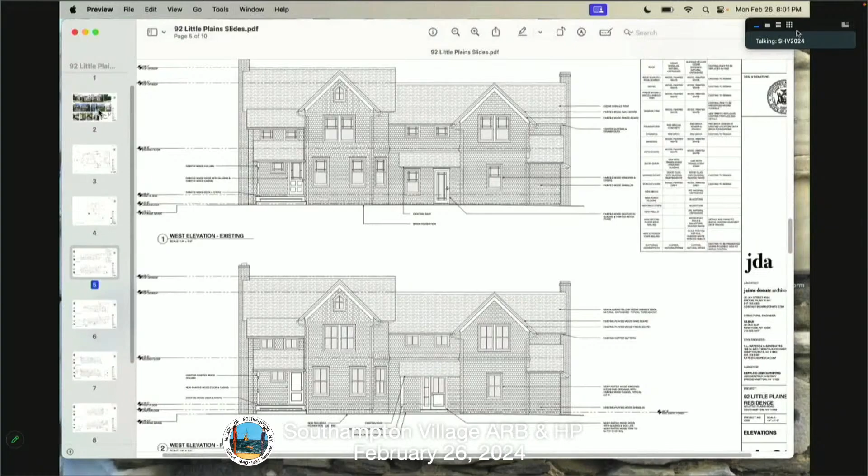In the front of the house, we're also looking to replace the existing windows. Let me pull up a photo to help you out. The existing windows are definitely not the original windows. I'd say they're a modern interpretation of a multi-pane window, and I find that they stand out.

They're very modern - the way the detailing works, just with the two squares in the corner, doesn't seem historically correct. You know this better than I do, so that's just my opinion. I think what we're proposing is to change the windows within the same size and pretty much the same configuration into two-over-twos.

I find that these modern multi-pane windows are distracting. The house is actually very charming, and they kind of stand out. We're looking to make them two-over-two, and we think it would quiet it down and be consistent with what's going on in the rest of the street. There's all kinds of windows - even similar houses have all kinds of different styles. So we think it would just quiet it down and make it stand out a little bit less.

The only other change we're proposing, other than the windows and doors, is this entry. There's a side entry here, basically in the middle of the house, but it's really pushed back from the street, and you barely see it because this one area blocks it. There's a porch really, and we're raising the floor inside because of the flooding, so we'll have a step to go from grade into the house.

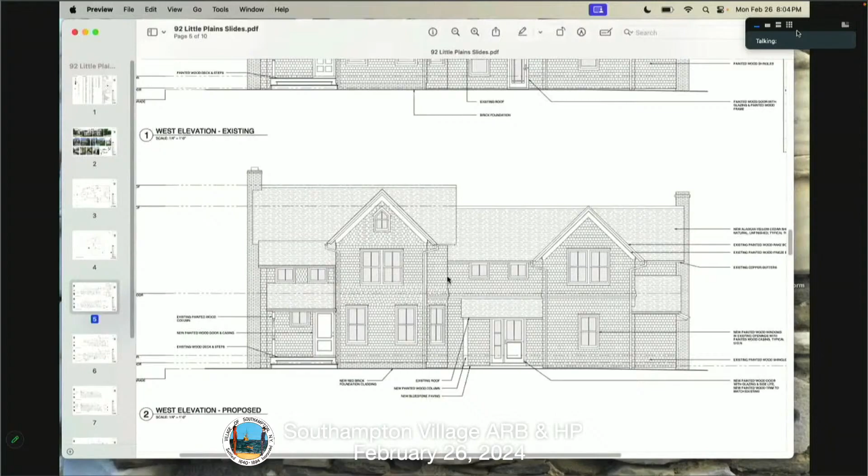This house is actually kind of similar, with the same issues as the Elm Street house. Yeah, the ones up and down the street are natural cedar, and they're gorgeous, but these are painted - they look wedding-cakey to me when they get old. But it would be hard for us, since we're not looking to reside the house.

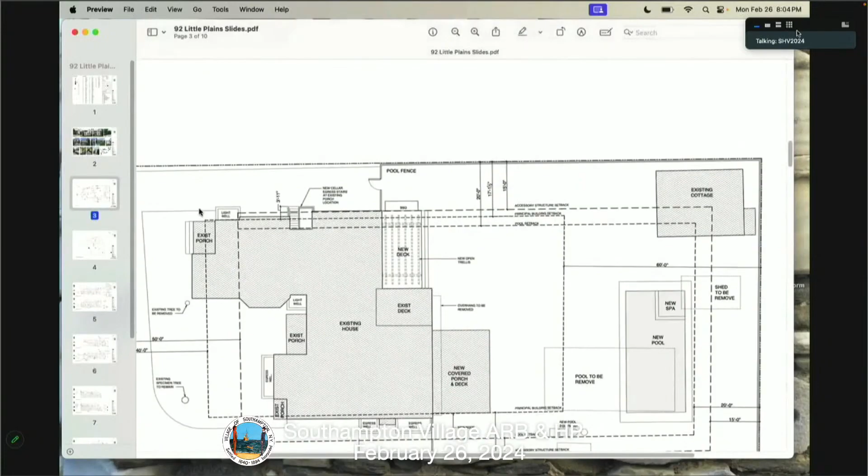This is the north facade, which is along the top of the page. We are preserving pretty much the facade. There is a side entry that goes into a mudroom, which we're using, and there's a deck there. We're looking to reconfigure that so there's a relatively small egress for the new cellar. Right now the building goes in there, the footprint jogs, and we're using that to get us into the new cellar to create an egress staircase. We're also reconfiguring some of these windows, but other than that there's no change on that facade.

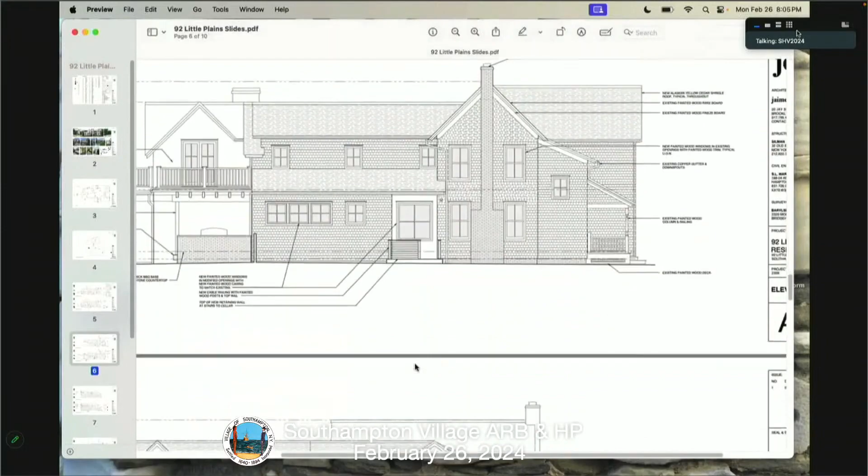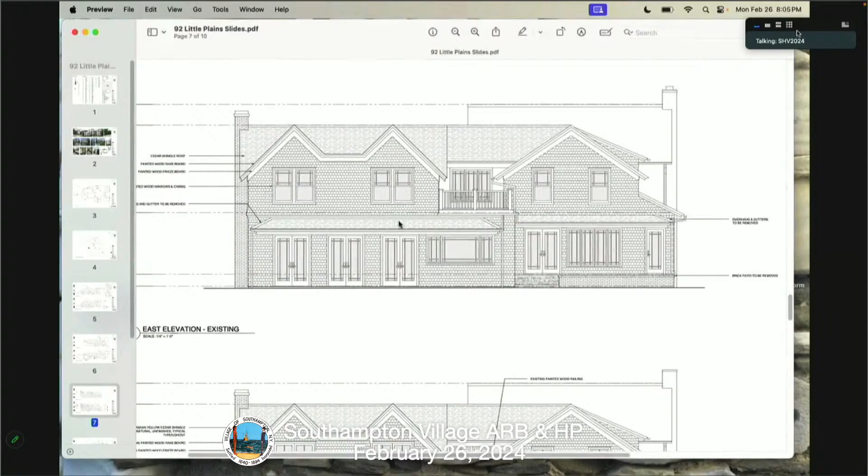And then the rear facade, or the east facade - this is the existing condition, and this is where it almost fell apart, because I think the existing conditions are not as good as they are in the front in joining the two. There are three pairs of French doors with the same detail as the existing windows. There's a kitchen window with a very large pane in the middle, and there are these deep overhangs on both sides that just hang.

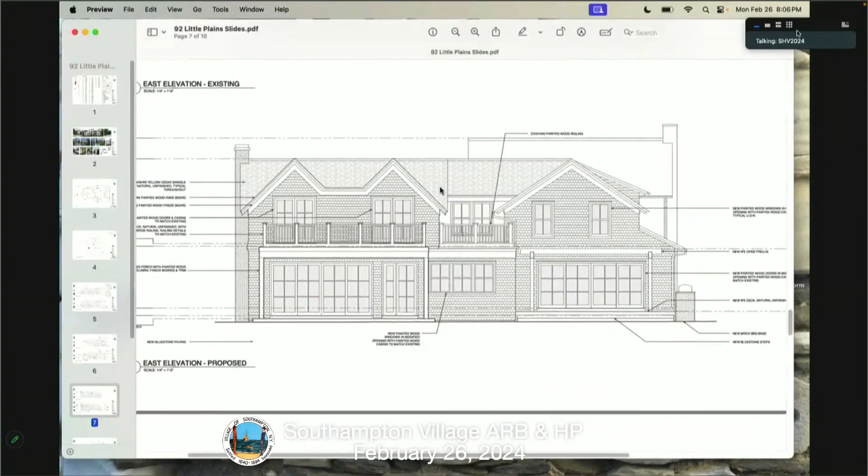What we're looking to do is reconfigure the doors so there's still a good amount of glazing, but we're proposing to build a porch in front of them. This porch basically picks up with the one that's existing here - it's a porch with a deck. The deck mimics the one that's existing over there, and it starts to unify the facade. So in a way the facade is more about this band tying it all together, and the more modern, more open, more glazed portions are pushed back. This is the back of the property too, so this is within the property in this view.

And then this - I don't know how this happened, but there's a lot going on here. I believe this is a partial addition to the house. There is a raised patio and a collection of different types of windows and doors. We're looking to unify that into a deck, because the masonry patio is falling apart. We're looking to do a wood deck and put a pergola or open trellis over it.

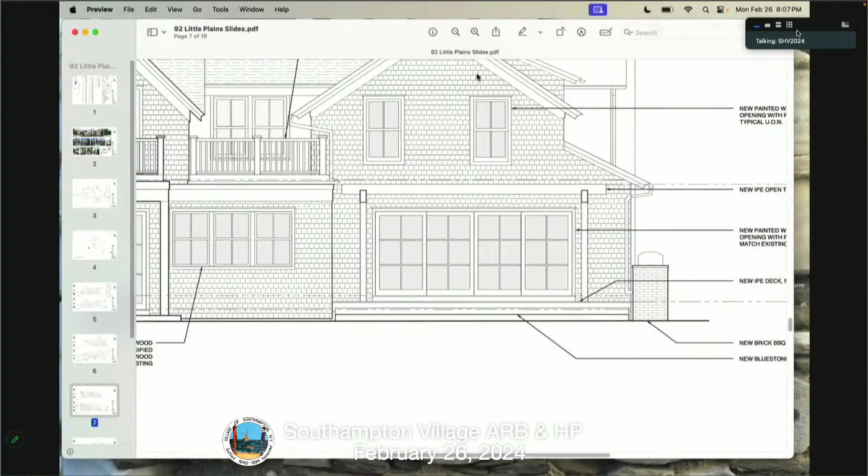Okay, let's see if I'm missing anything. I think that's pretty much it.

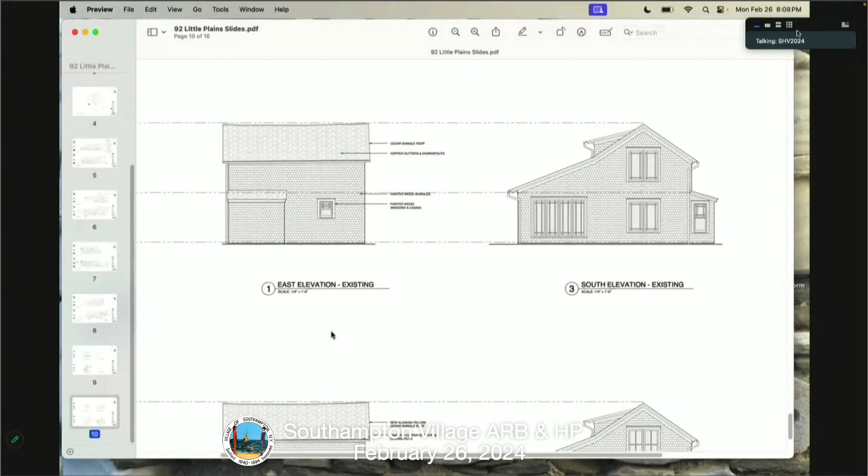There's also the elevation of the cottage, which does have this kind of charming angle to it. We're looking to preserve it as it is. The only thing we're looking to do is change the fenestration from this pair of French doors to more glazed sliding doors, making it more open to the backyard and pool, and changing the windows. But this building will stay where it is - we're just changing the windows.

I believe that's it. I'm happy to go into more detail on any of these items. I know it's a lot of pieces - let's go to the board members and see what questions they have, and we'll start there.

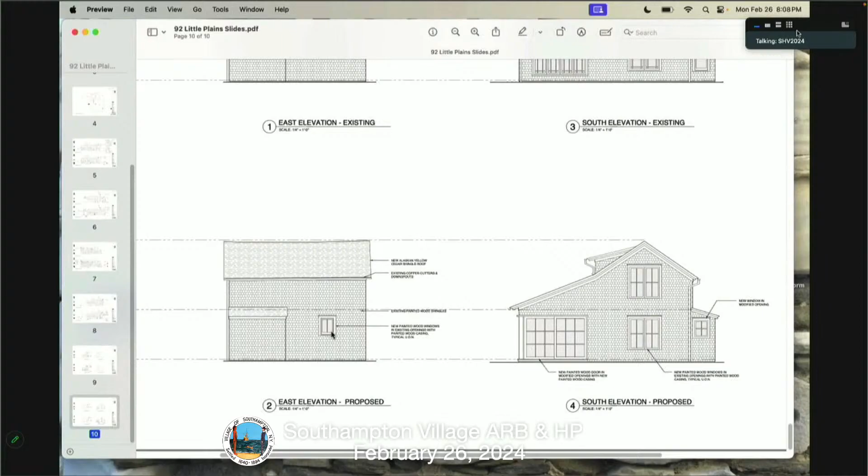Board members, and again, we will be asking for a historic report of this house. Okay, board members.

I'll start because I believe this was Larry Rivers' house, and I also think the shed might have been a studio at one point. So I think that's something we really need to find out before we consider whether we can remove it. I think the house is so charming with some of the idiosyncrasies - the quirkiness - and because I know it was Larry Rivers and remember him living there very well, and I've been in the house, I just feel like you're kind of taking some of the charm away.

I don't know if those are original windows or not, but the window in the front that looks like the attic window - it just seems possible those might be old windows. So I'm really curious what Zach has to say about this too.

Which one - here in the front, street facing? I'm not so sure the windows were the original design. We don't know until Zach looks at it. This is probably - there may have been replacement windows into original openings, that's what it looks like. But it's more the muntin pattern that doesn't seem historic. We'd also like to see if he can find some historic reference for what it looked like before that.